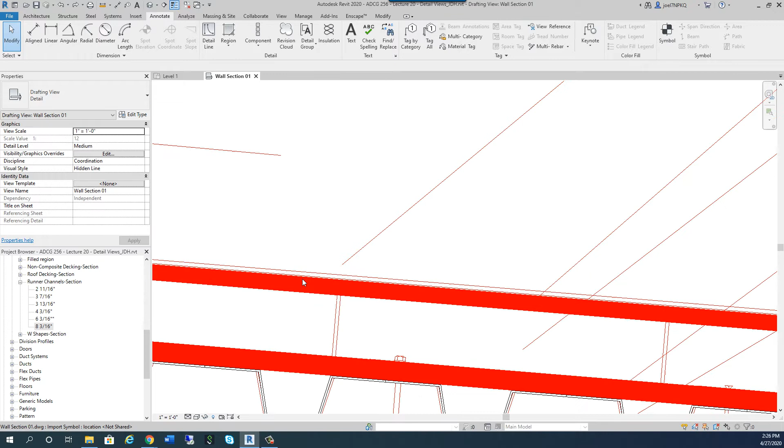For instance, on our roof, we've got a TPO membrane that's super thin, right? And then we've got this board, a 1/2 inch cover board, and then a 5/8 inch cover board, and then some insulation. Okay, where would I get that stuff from?

Well, if you go to insert and load family, I'm going to get away from the metals for a while because there's some other things you can get there. But I'm going to go to thermal and moisture protection. And under thermal and moisture protection, you see I have thermal insulation, I've got roofing and siding, I've got sheet metal flashing and trim, and you're going to need that on some of the other projects.

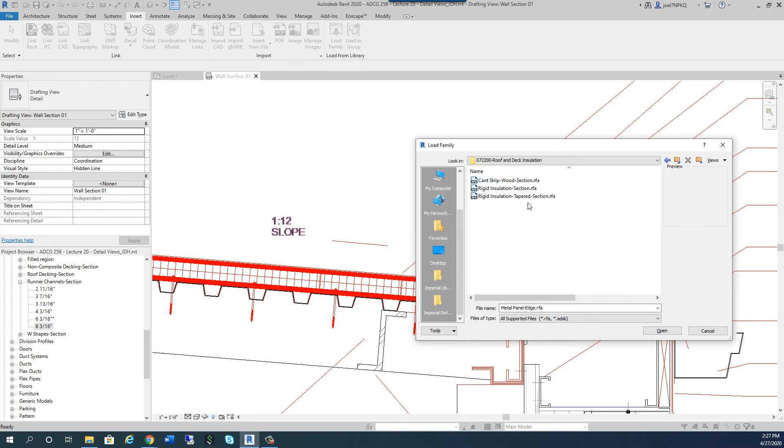But what if I went and got roofing, do I need siding? No, I don't have any metal panels. I don't need anything like that. But under roofing, I'll definitely need thermal insulation, right? And I can say rigid insulation section, and I can say open.

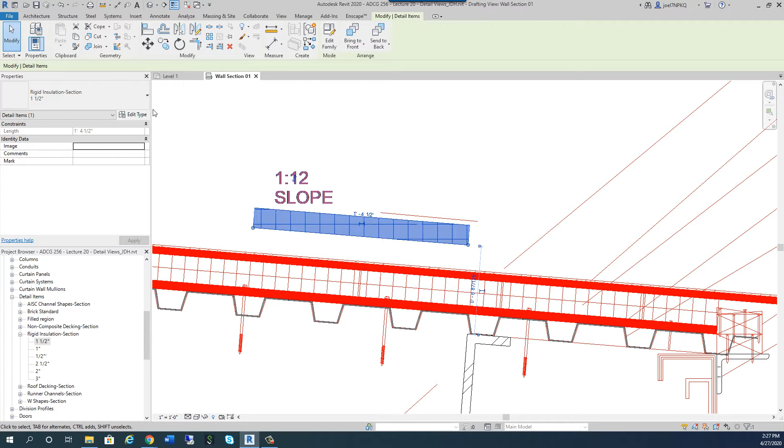And now that I've got the roofing insulation, under detail items, rigid insulation section, I'm pretty sure this is 1.5 inches. So I'm going to pull this out and watch what happens. There's my rigid insulation section. Now that's 1.5. Maybe mine is 2. Let's check.

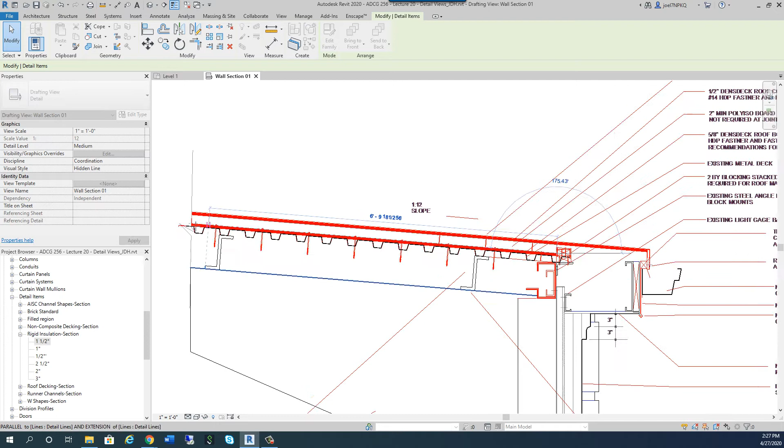Let's see, let's move this. All right, let's put it right here. Yeah, that looks about right, people. Right? And what's great about that is I can grab that and drag it, scroll, drag, drag, drag right up to my break line, right about there. Look at that. Now my insulation's in there, right?

Now I could go in here and edit the type and fool around with some things so the insulation was more, but I'm not going to worry about that now. That's not a big deal.

What about those cover boards? The gypsum here and the gypsum here. Well, if I go to load family and I come up here and I say, let's go to, I don't know, where would those cover boards be? Where would gypsum, remember where that is? Up, wait a minute, finishes, maybe, right? Plaster and gypsum board.

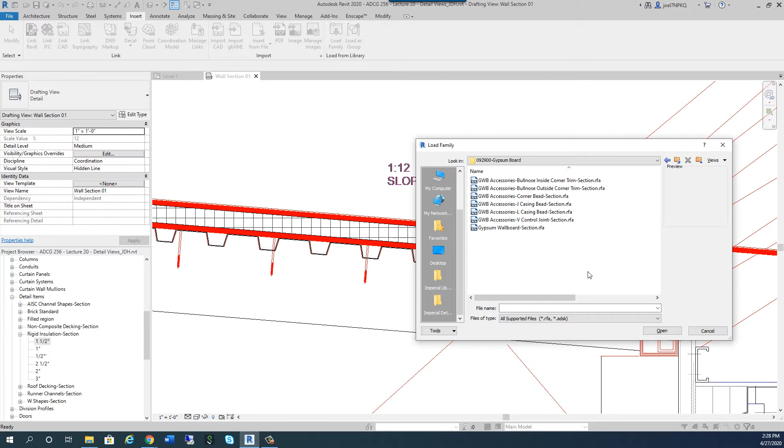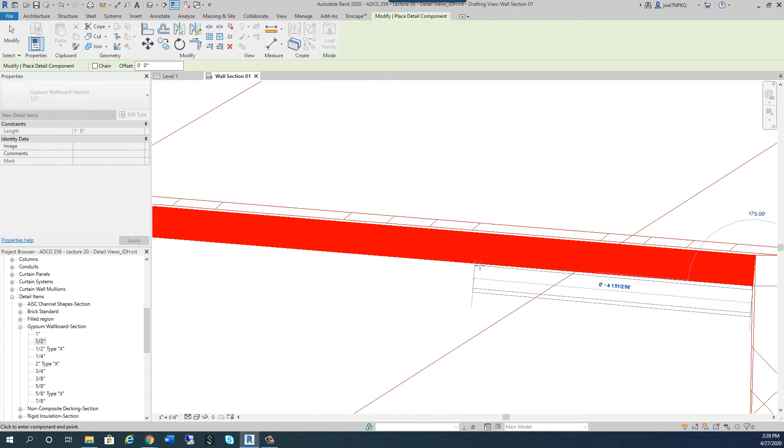And I can say gypsum wallboard section. And now that the gypsum wallboard section's in here, I can say I know I need a 1/2 inch here. And that 1/2 inch, if I start it here, you see how that's on the bottom of there right now? But look how I can hit my space bar and flip it up on the other side, and I can draw it there.

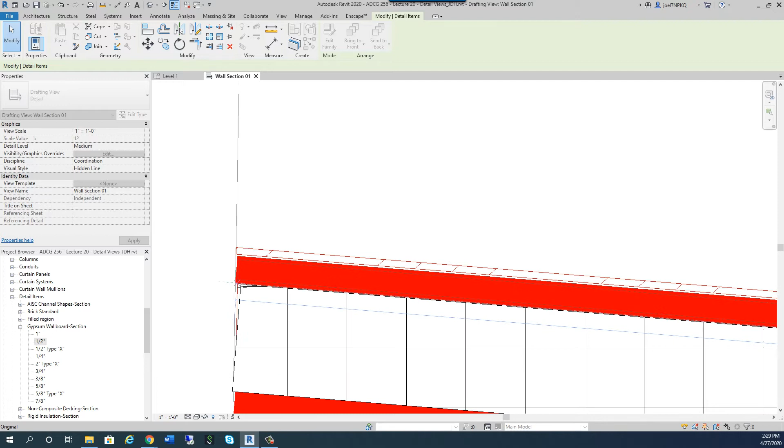Now I can also say align to here, that, and now it's aligned. And now I can grab that and pull, scroll out, and I can pull all the way up here. And there's my gypsum board now.

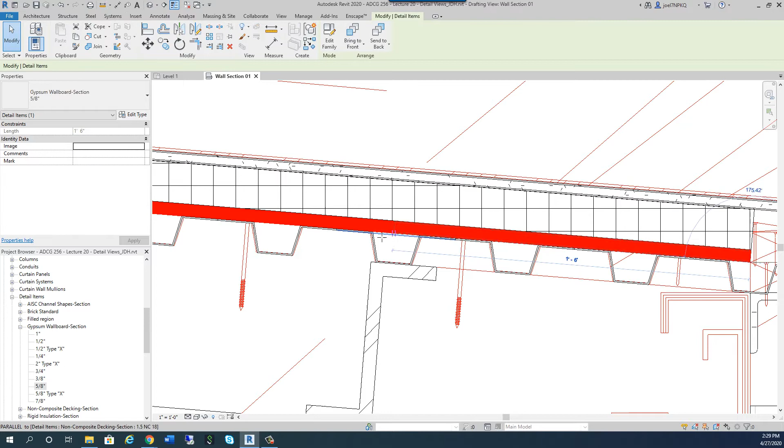The same is true for this 5/8 piece at the bottom. I go to 5/8, and I could make it type X. But if I just drew it like this right now and hit my space bar, you see how it's covering? And I can pull, scroll, scroll out, scroll in while I'm holding down my left mouse button. I can still scroll, and I can come right to there. And that's good enough. So now I got both my cover boards on there.

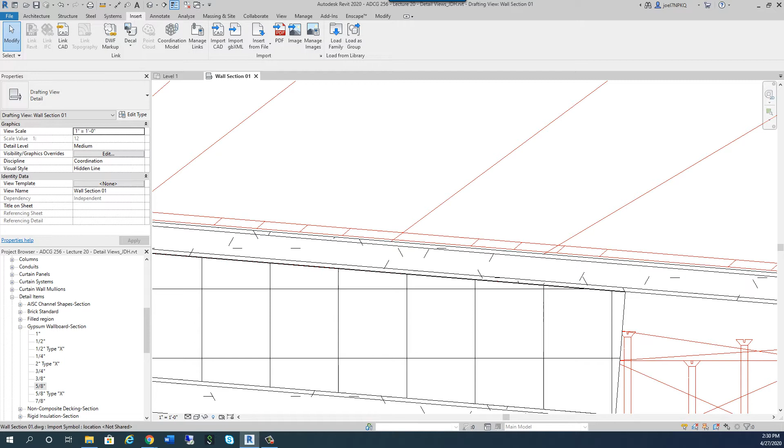Now on top of this, I've got this TPO. Now where might I find that? Let's pause the video and talk about something. So we determined even though it should be under Division 7, it's not actually there. So how am I going to handle this?

Well, I'm going to go in here. I'm going to have to make my own. So if I go in here and I say load family, or not load family, I can say annotate, and I can go to detail line, and I can say, how would I go about this? What if I just use a filled region for this?

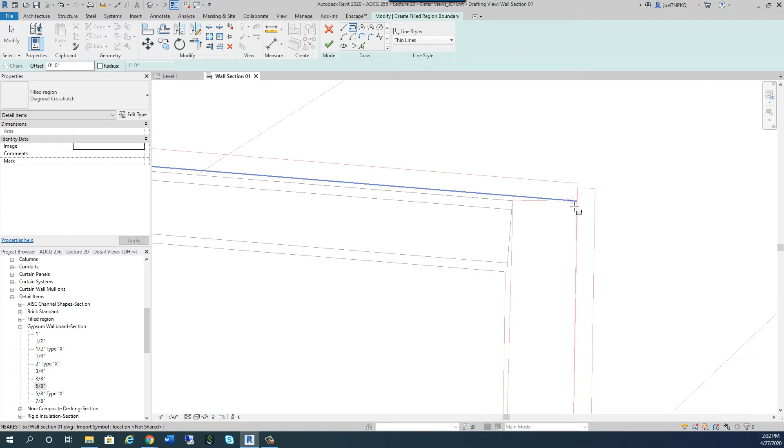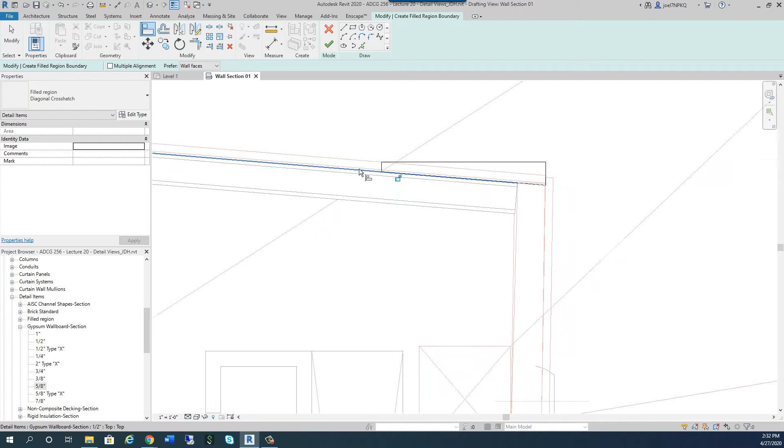And for that filled region, if I use a rectangle and I drew from here and I try to align that, how would I align that? Well, if I drew this, what if I drew this and I just drew that and I said align to here, this. You see, and then I said align to here, that. Whoops, it doesn't work, does it? It keeps drawing one edge or the other. So how should I draw this filled region?

I should probably just come in here and say pick line, pick line.

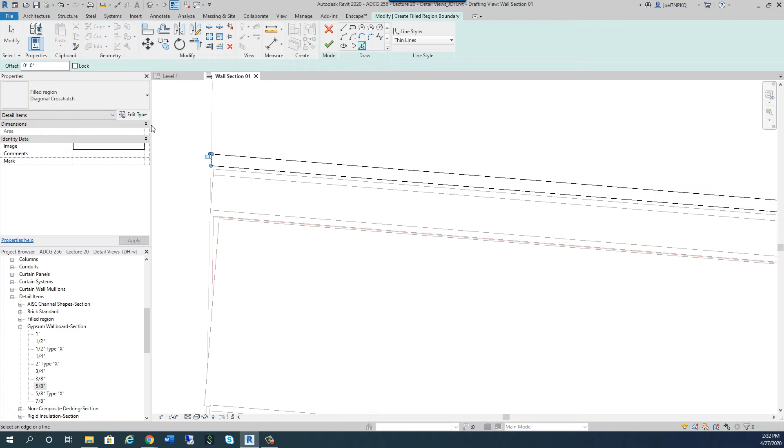Sometimes it's simpler, people, just to pick lines. All right, there, all my lines are picked. And now I can say I want to use...

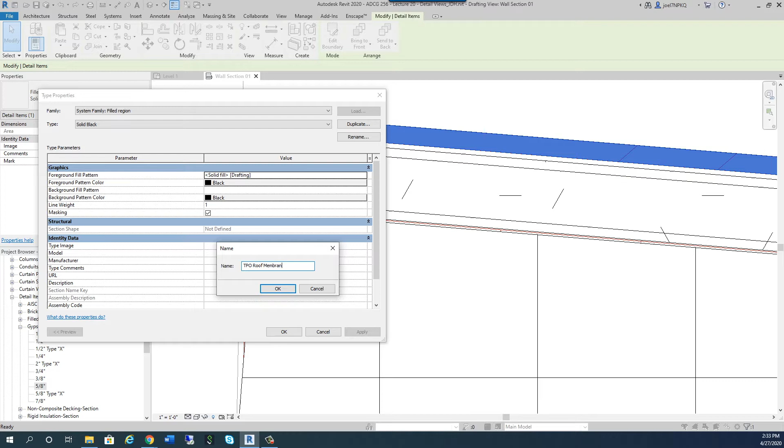Maybe I want to use a solid black, right? But then I want to say, if I finish that, that may be a little dark for what I'm doing. So I might come back here to this fill region and say edit type, and I might say duplicate, and I'm going to call it TPO roofing, roof membrane. And I'm going to make that color this nice gray right here, that light gray. That looks a lot better, doesn't it? Okay, so that's how you start doing some of these.

And I would do the same because TPO has to wrap over and be adhered to something. And the whole thing kind of wraps over. So you don't have this straight portion here.

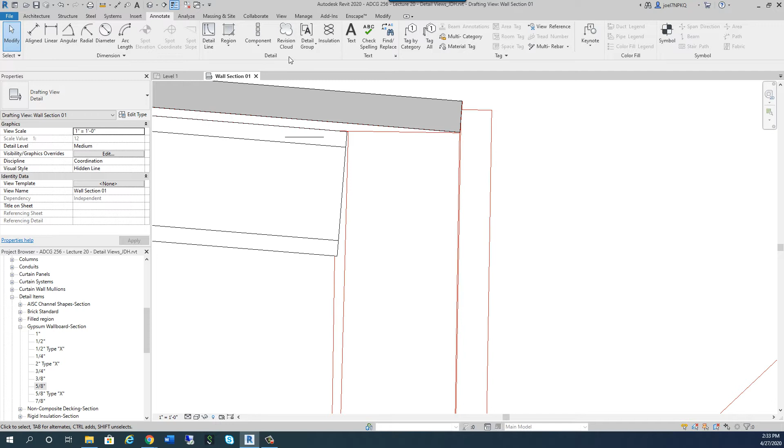So what I would probably do is say, let's do another filled region. And let's do the TPO roof membrane that we created. I'm going to say hover, tab, tab, click, right? And so I got all of that. And then I'm going to say, let's delete that.

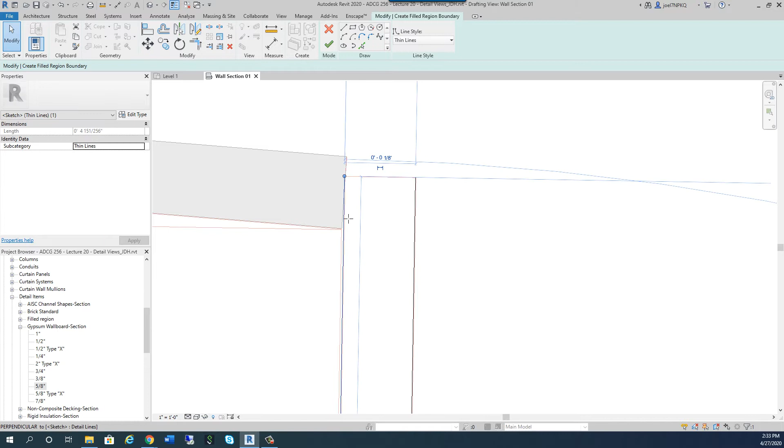And then here, I'm going to pull this down just a little bit, right? Right there. And then I'm going to give it a fillet radius. You see how I'm just doing a little bitty round thing right there. And then I'm saying, trim these two together. And then I'm even going to say, all right, that's not so great.

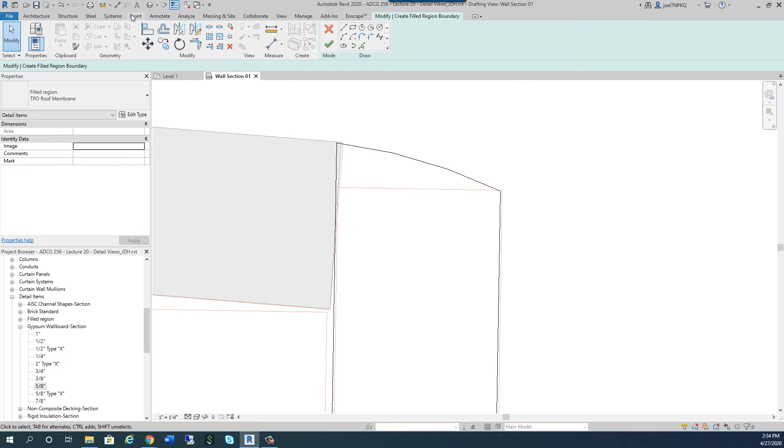Let me go back and say, let's draw a line that goes from here, right, to maybe right there. That's a little closer. And then I'll finish it. And that's good enough. You see how it kind of wraps over?

And then I would probably go in here and say detail line. Let's make this a little fastener in here. Let's pick lines, 1, 2, 3, 4, right? Whoops, let's go back, mess that up a little bit. Detail line, pick line. I've already got 1, 2, 3. I just want that fourth one right there, right?

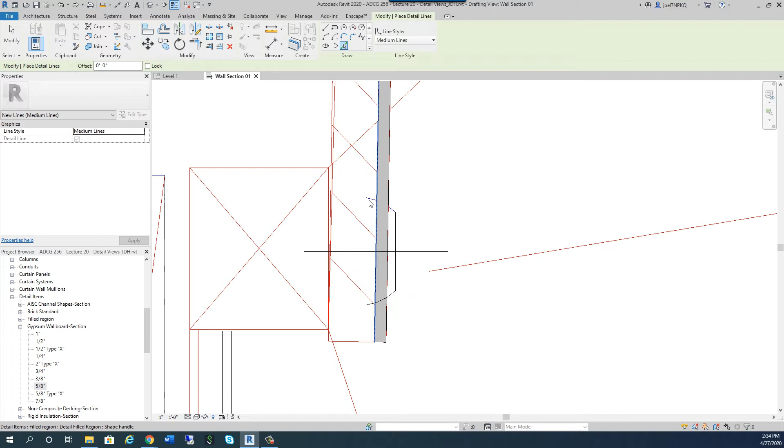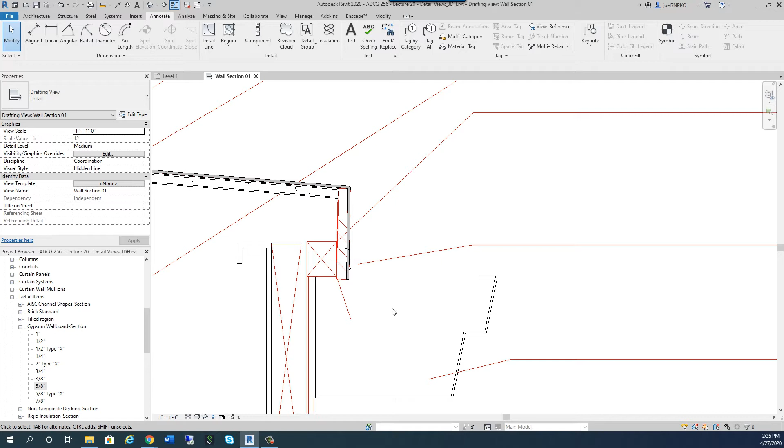Because that's that ring shank that they push into the fastener along this wood strip right here to hold it into place, right? And just for technical terminology, a lot of times instead of mechanically fastening, we'll adhere it, because if we don't have to puncture our membrane, especially on the top, we don't want to do that. We adhere it up here, but we actually fasten it on the face.

And then we have things like the gutter, this piece of wood, and this other stuff that has to get drawn in. We've got some more rigid insulation along the wall here. And I'm going to leave a lot of that to you to finish up.

But in the meantime, this isn't the only one that you're going to have to do. And you're probably like, oh, Joel, you're killing me. Well, the next step for you in this portion of it is to go in and say, all right, well, this is my first drafting view.

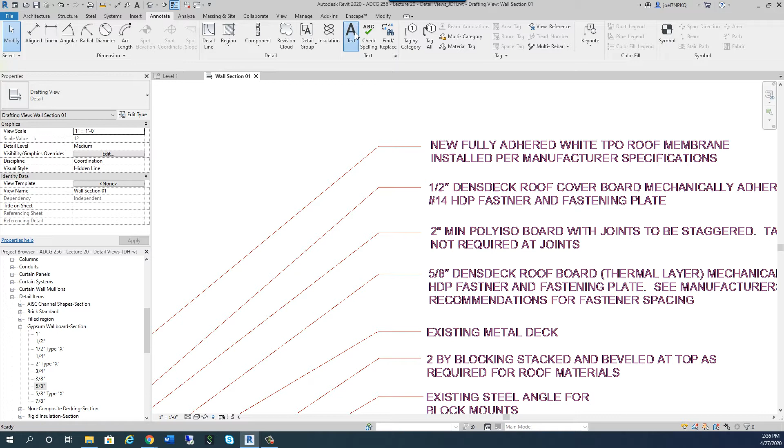And whenever I finish all of that, including the text, and for the text people, you're just going to pick a 3/32 inch Arial text. And you're going to have to just go in and type, you know... Let's say we put that in there, right?

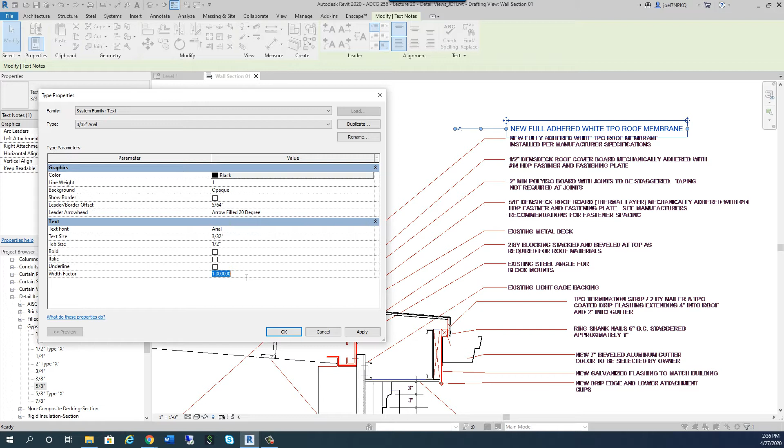So we've got our text in there and we click on it and we can go in here and give us a filled 20-degree arrow. That's what Joel likes. And we can make our text a width factor of 0.75. You know, it makes it a little thinner, see how it does that. And you're going to point down and look at these things, right?

And you make your text line up really nice like that. You're going to do all that for these as well, so you're going to type all that text in. It's a process, people. But let's look at these next two wall sections, all right?

We need to set the drafting view for those. So again, we go to view, and we'll go to drafting view, and we'll say wall section. Now for this, I'm going to make these 3/4 inch equals a foot. They're going to be a little smaller, right?

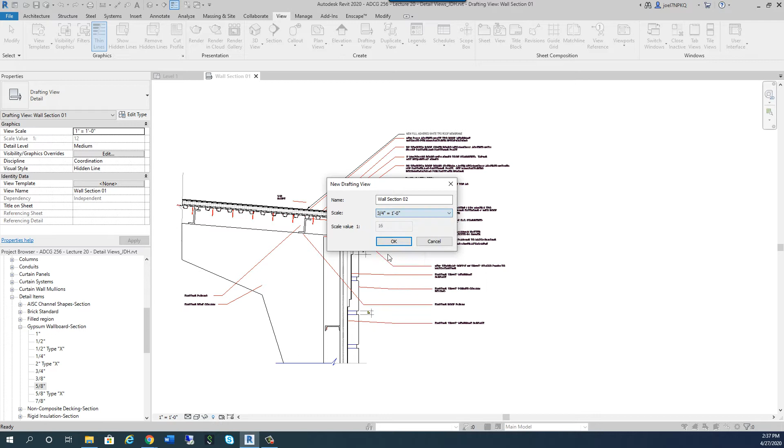Wall section 2. And the last one I'm going to do one more drafting view, and this is going to be called wall section 03, at 3/4 inch equals a foot.

In wall section 02, I'm going to go in here and say insert, and I'm going to say link CAD - sorry, not load family. I'm going to link CAD, and I'm going to use wall section 02 here.

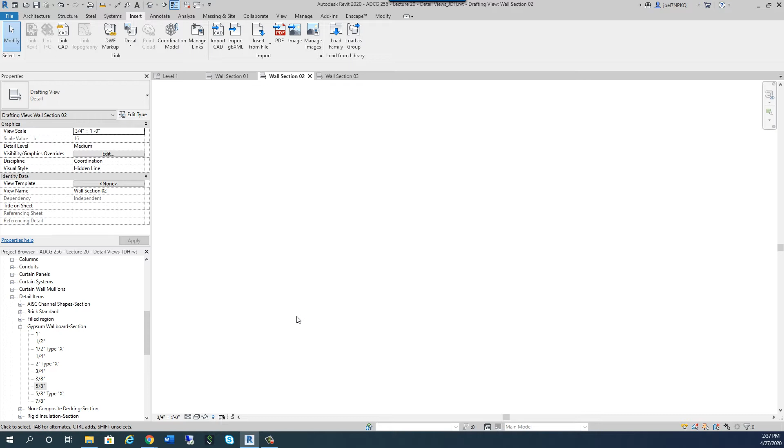Now you're like, oh, what happened, where'd it go? If I hit ZE on my keyboard for zoom extents, there's my wall section 2. Then in wall section 3, I'm going to do the same thing - say link CAD, go to wall section 3, do all that same stuff, say open, and just do ZE on my keyboard. And there's my wall section 3.

So what you're going to have to do is go in and do some of the same things that you did in the first video. You're going to be drawing in these items to the best of your ability, as far as using actual Revit detail items in some of these.

Like for instance, there's our decking again, right? There's our friend the metal deck. So where did we find that? We said non-composite decking section.

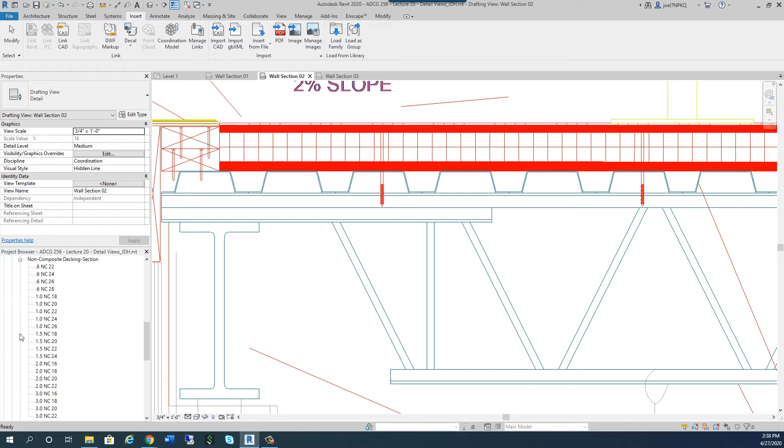And if we measure what this is, we'll find out that this is about 1.5 inches. So that's 1.5 inch, 18. If we bring it in, look at that, fits pretty good there, right? And I can bring it in and I can just say

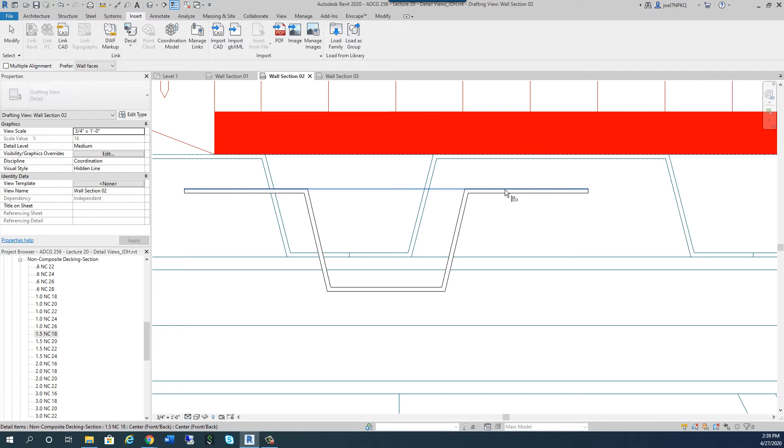Align to here, right? And then I can grab that and say move that from here over to here, and I can go snap in. Up, that snap in didn't work too good there. Let's try this again - let's say, can I align this to here? Will that work? Nope, that doesn't quite work.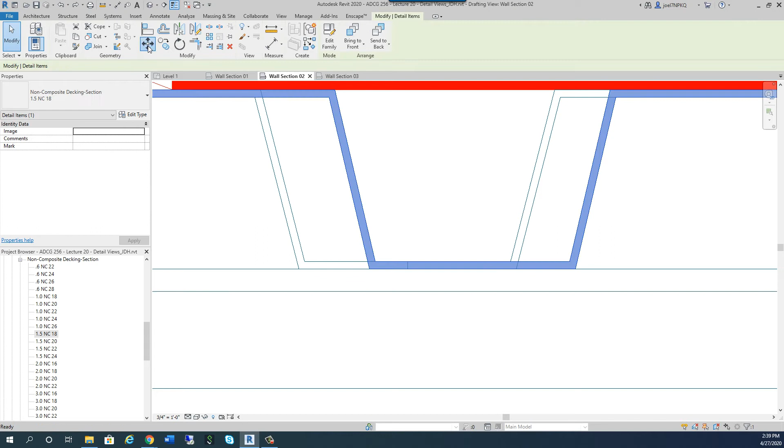So because they're a little different in size, if you remember that from before, we'll just move it over approximately, and that's going to do just fine, people. You know, you can kind of split the difference a little bit. It's not going to really matter.

Because once we turn off our CAD file - just like in this first one, when we're done with everything - we're going to click on this, come down here, hover, and right click and say hide in view, elements. You're going to do that in all of your wall sections when you draw them.

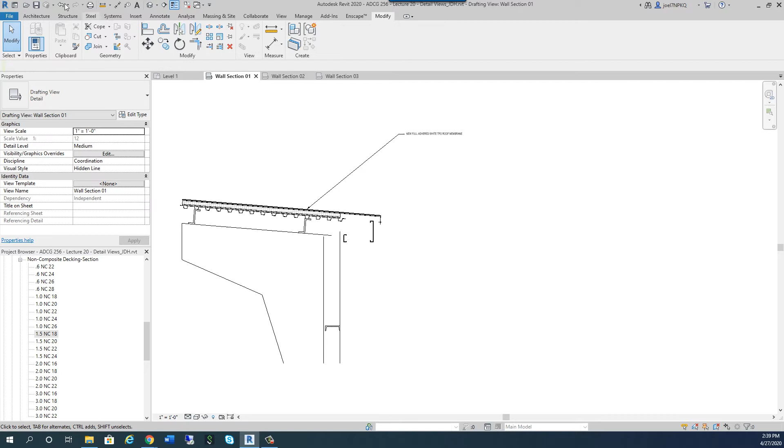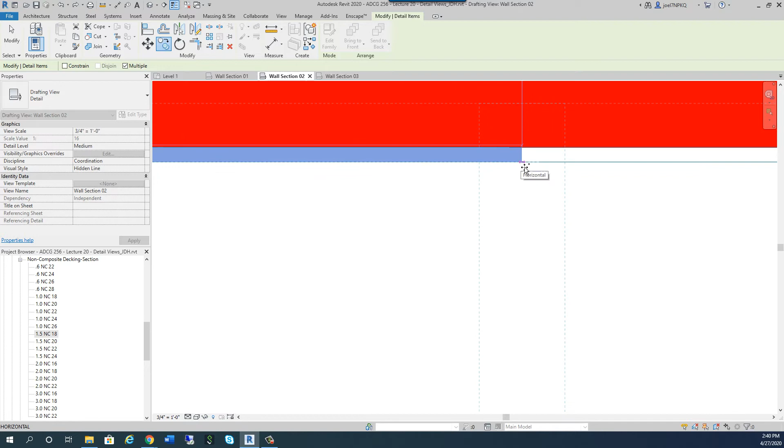Now just a couple other items in this second one, just so you can kind of see it - I'm going to copy a few of these just for housekeeping purposes. I'll go ahead and just, I've got multiple selected, right, I've got that in here.

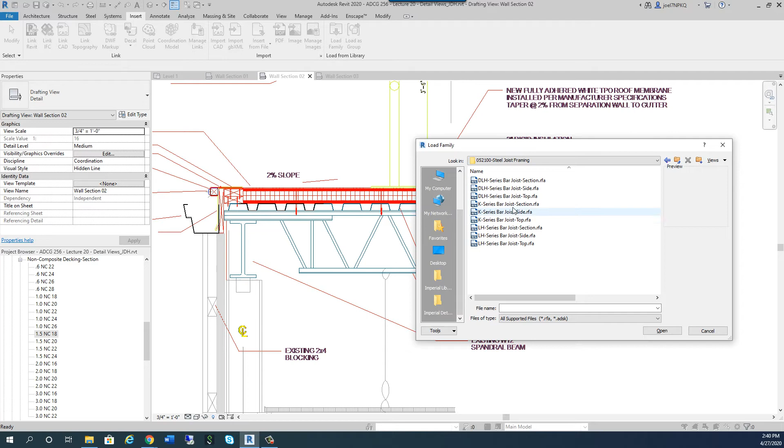A few of those. And then what about this joist? That would be a pain in the butt to have to draw. Well, the good news is you don't have to, because if you go into insert and load family, and we go back up to division 5, which is metals, we can go to what? What can we look for? Steel joist framing.

And I can say this is a K series from the side. I'll say okay, and I'll say maybe this is a 12K5. I'm guessing right now, but as I look over here, 12K5 - that's close but no cigar, right?

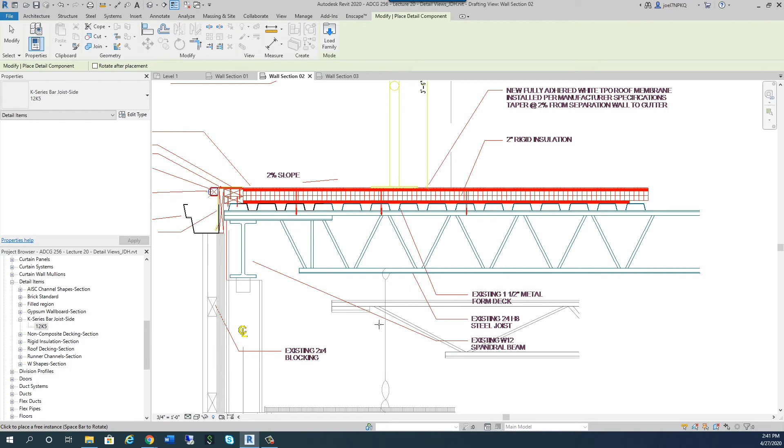So I'm going to place that there just for a moment, and then I'm going to come up here and say, if I do a measurement from approximately here down to here, I'm at what? I'm at 13 inches - 13 inches, 1 foot, 1 inch. So this right here is actually what? That's 1 foot. So is there one that's 13 inches deep?

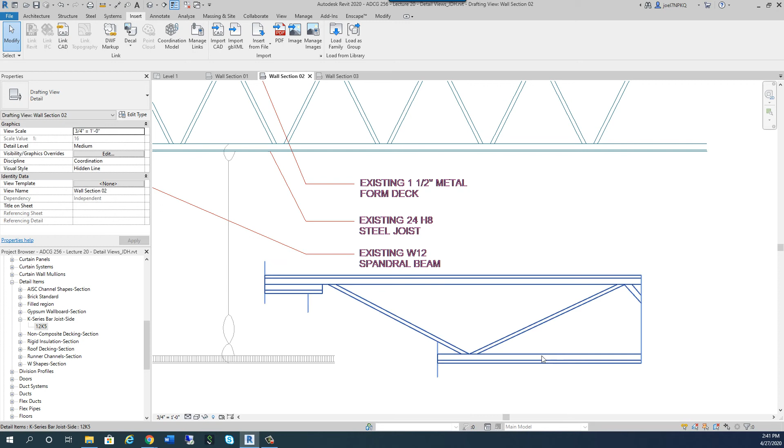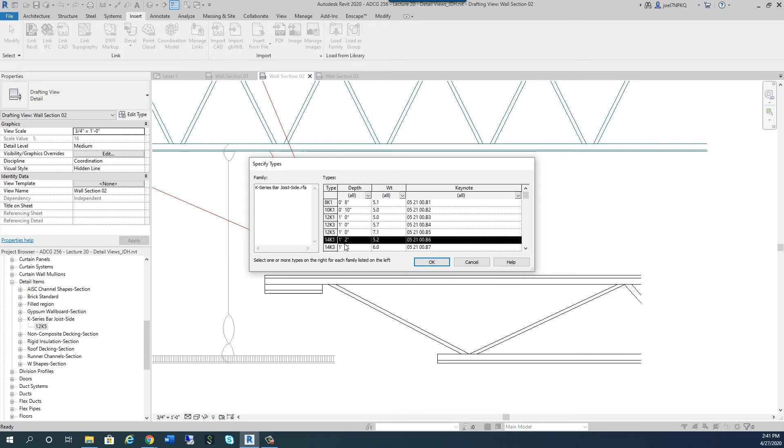It probably is, let's see if we can find one. Let's load family, go into the K series, and say open. Is there one in here that's 1 foot 1? No, there's one that's 1 foot 2, the 14K1, and that's close enough. We'll click on that and use the 14K1.

Now what I can show you, I'm going to move this up and move it over. So the seat is sitting right on top, right? It should be sitting right on top of that beam, but because it's an inch deeper, it's a little bit of a problem. Here's what I can do, people.

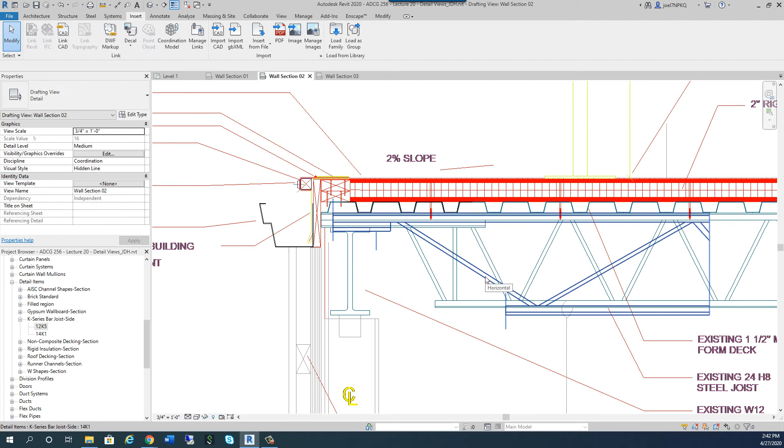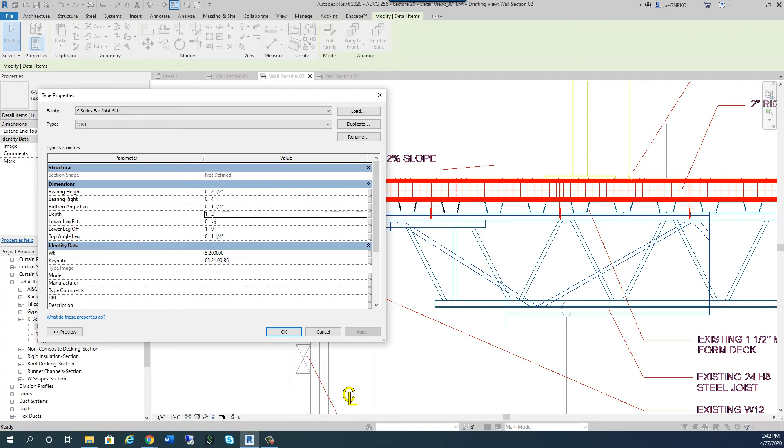I click on this one and say edit type. The nice thing about this, let's make one called a 13K1. There really isn't a 13K1, but I'm just going to make one for our benefit here. And when I'm in here, look at this depth. I can change the depth to 1'1". Now see how that thing fits a lot nicer in there?

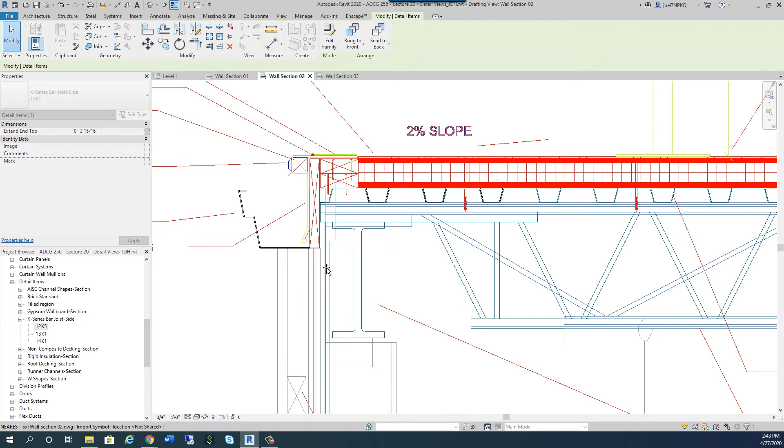You're like, Joel, I don't like how... you see how you can change the size of the seat that's in there, right? So if I say this seat is aligned out to here, see what I'm doing? I can also align my seat a little further out, maybe to right here, like in the CAD file. It's just a little bit of trial and error, people. I'm not asking for it to be perfect, because a lot of times what's shown in AutoCAD drawings can be wrong, right? But you see how that section is shown right there, just like that.

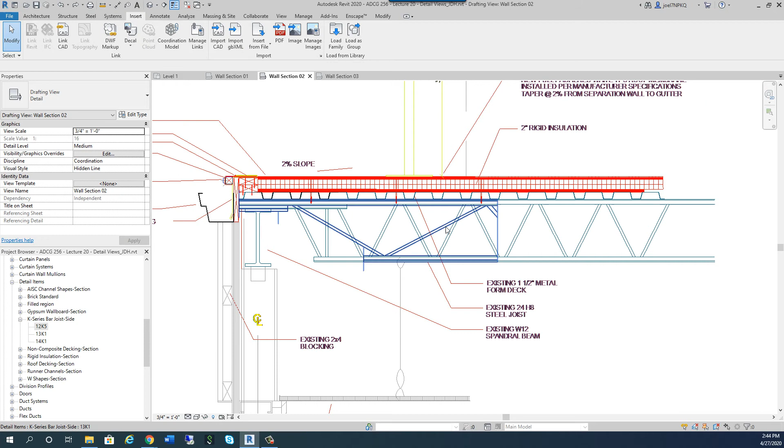And if I keep dragging that out there, look what happens - that thing comes too far out. So what's going to happen in this instance, because you have so much in this particular view, and you don't have all the rest of those in there, we would typically cut our detail off at that point, because we really don't need everything that's back here. You see, we're showing a lot more of the decking than we really need, so we really just need to show it up to that point.

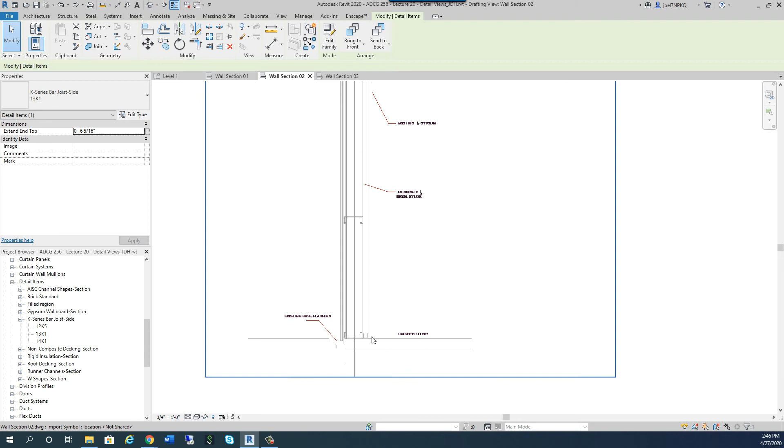Now I want to pause the video and talk about something for a minute. So we kind of talked about how to handle this situation with the joist, and you'll be able to not worry about having to edit that family, and you only need to show so much of this. All of this past this point isn't really as relevant in what we're doing now, but we do have other items in here that we're going to need to show. So what you use as detail lines and what you use as physical items is kind of going to be up to you in this sense.

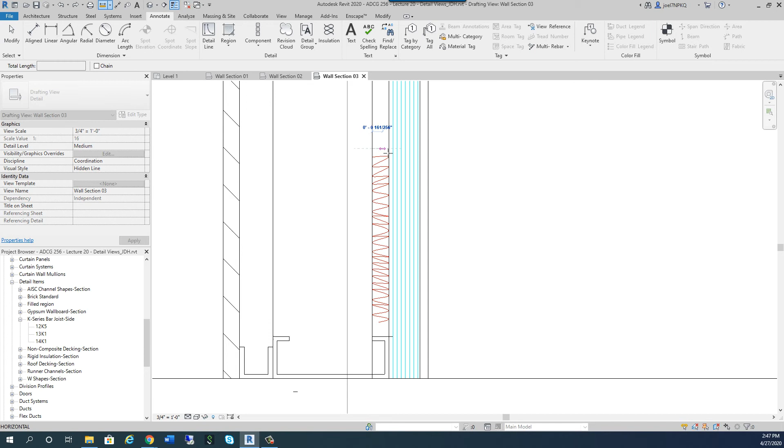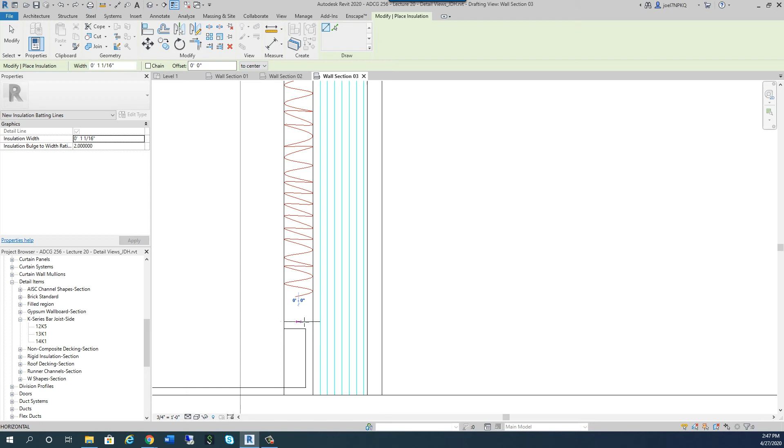You see that for what we're doing here, and you'll be able to draw that as far up the wall as you need to. In that instance, you can start there and then start again in that section, right? Little things like that.

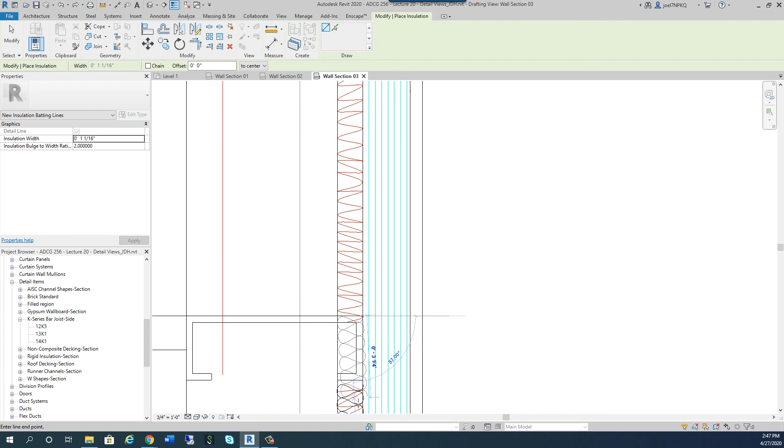Revit makes it really easy to draw a lot of this stuff. One of the other things you might have trouble finding is fasteners. I didn't talk about them much in the other video, but if you go to insert and load family, fasteners aren't all that hard to find. Go under common work, and then metal fastenings, you might find something in there.

You're not going to use a bolt, of course, because those are screws. So where might we find screws? We might find them under section 6, wood and plastic, common fastenings. Is there anything in here? No, not really. They don't have anything under here in this particular version of Revit.

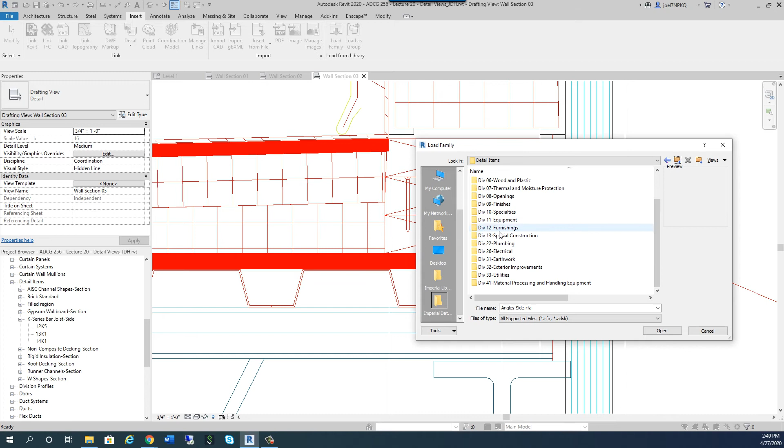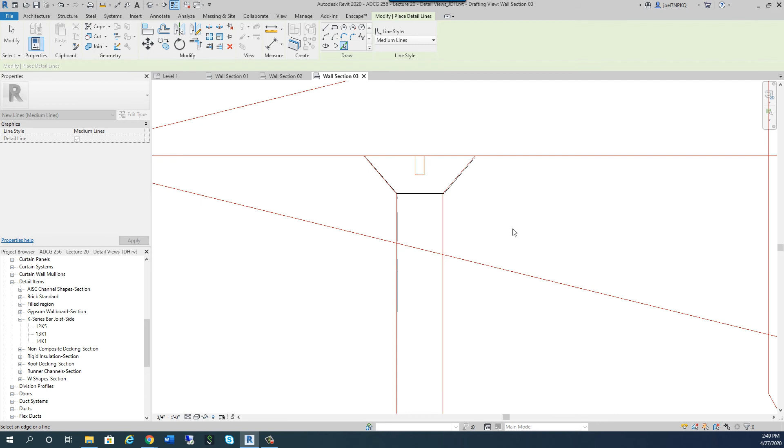What about under wood framing? No, nothing there either. So in an instance like that, where you're not finding something and don't think you'll find it anywhere else, that's when it's wiser to just go to annotate, detail line, click on pick lines, hover, tab, click, and select other lines as needed. Whoops, too small to create a line there, so I might have to actually draw a line in some of these.

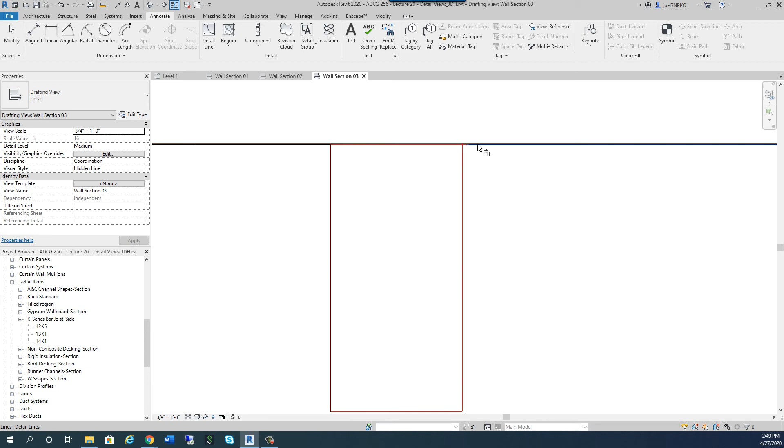Really, that's going to be up to you a lot of times, figuring out the best way to find some of these items. Once you've got one, you group it and name it something like fastener 01, or however you want to name it. Once you have one, you can make the insertion point that tip, and then just copy it.

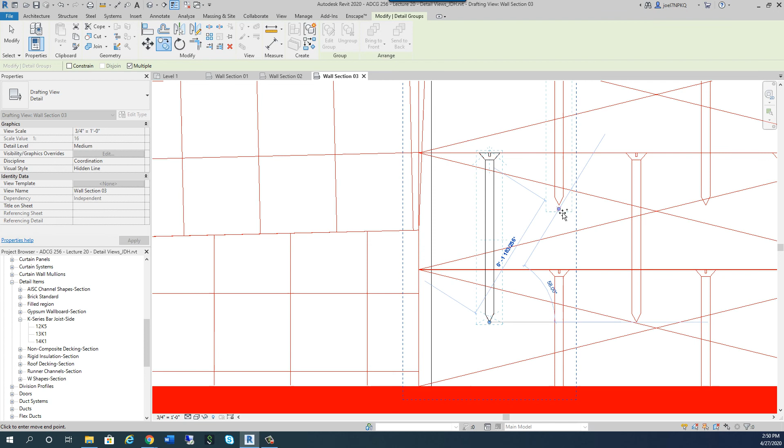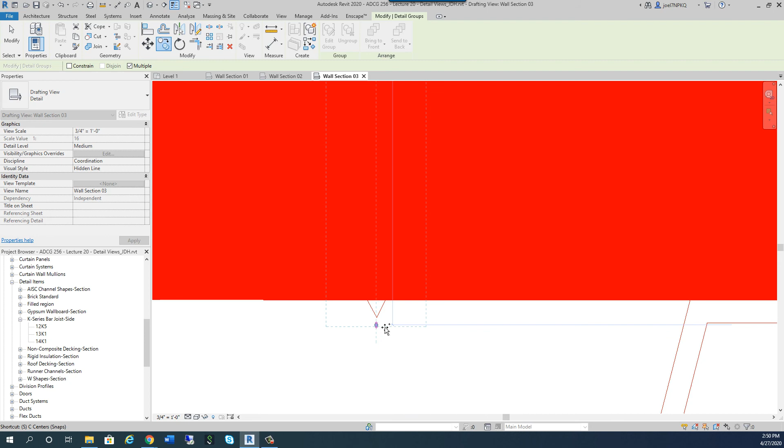Whoops, I meant to say snap end. Copy, then come up here and hit SE for snap end, and just kind of place them. I'm not going to make you watch me place a bunch of these, but just so you can see how that works - you're not always going to have something for Revit to put in there for you, so sometimes you have to make your own items.

It's even like with this insulation that's tapered - sometimes the insulation function will work well, and other times a filled region is going to be better for you. You'll make that decision yourself in that instance. So as you work on all three of these wall sections for this assignment, it's a little tedious, but important for you to understand.

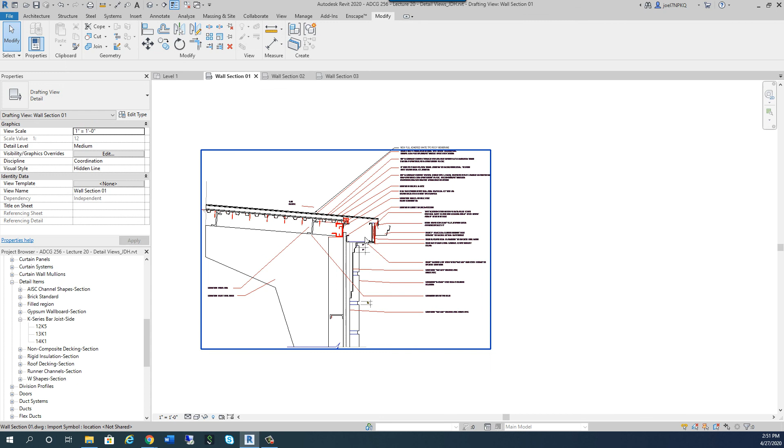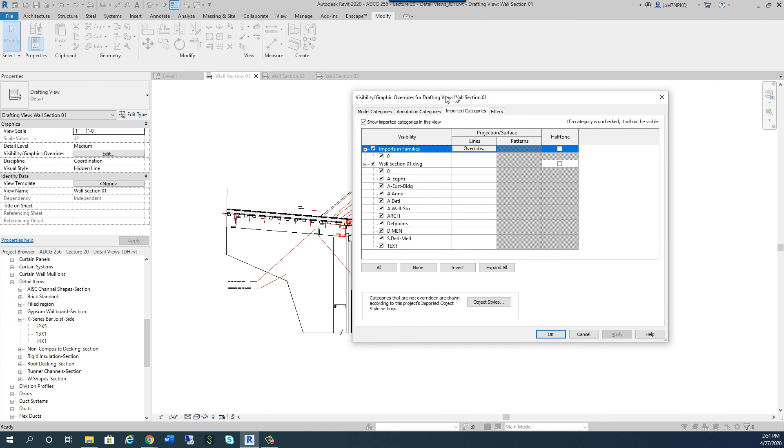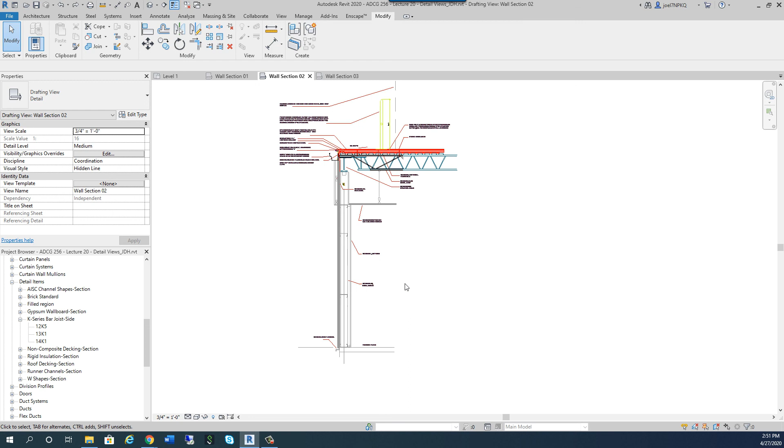One of the last things I want you to understand is this AutoCAD file in here. If I go to VG or VV, Visibility Graphics, look at these categories - under imported categories, you can look at the AutoCAD layers in these categories and actually turn them off and on. You see how some disappear, like if I turn off the text and metal detail and apply that and hit OK, some little things turn off. That's another helpful function to use, especially if you have it linked and not necessarily inserted. I know this is a lot of information.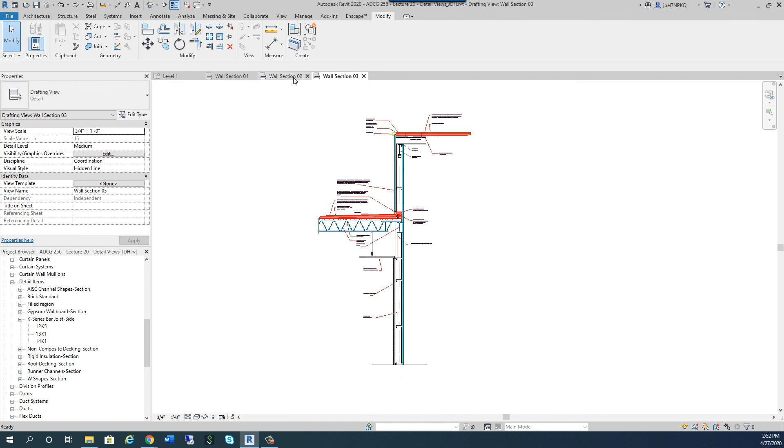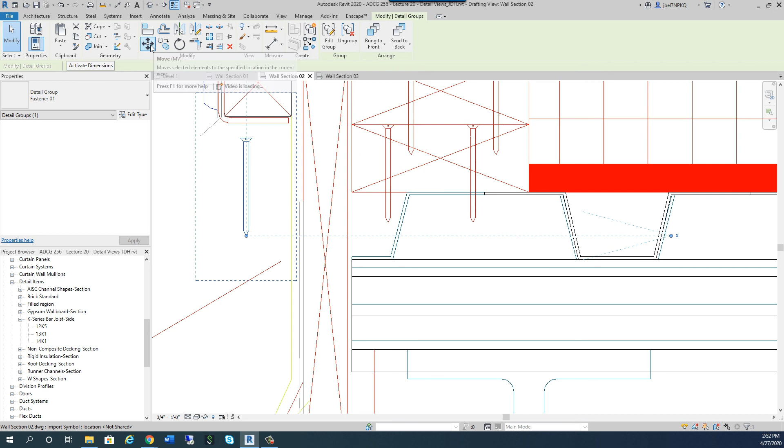The video went way longer than I planned, but hopefully you'll know enough to go in and use these. What's cool is if you use something in one view, like a fastener you made in this view, look what I can do - I can click here, copy to clipboard, go back to this section where I need it, and paste from clipboard, and there's my fastener. So you don't have to make it in every view - you can share it, copy it, move it, and use it in that view as well.